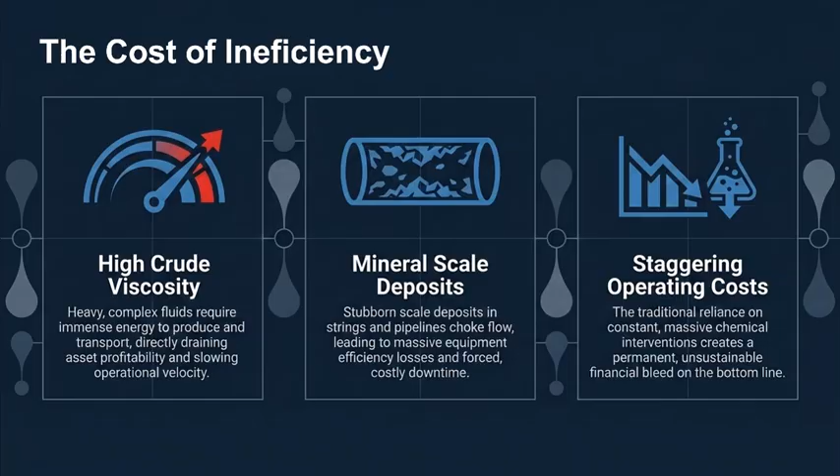Second, mineral scale deposits. Scale formation inside strings and pipelines restricts flow, reduces equipment efficiency, and can eventually force costly interventions and downtime. Third, staggering operating costs. Traditional methods often rely on constant chemical treatment and repeated maintenance actions, creating a permanent financial burden on the operation. In other words, fluid inefficiency is not just a technical problem. It is a continuous drain on reliability and profitability.

The oil and gas industry has traditionally relied on a reactive approach to fluid treatment. That usually means chemical dependency, surface treatment, continuous downhole injection, high recurring OPEX, and increased environmental impact. The Magnex standard changes this logic. Instead of reacting to the problem after it appears, Magnex applies proactive physical magnetic activation directly at the source. The system is installed inside the well, acting where the fluid is being produced, without depending on continuous chemical consumption.

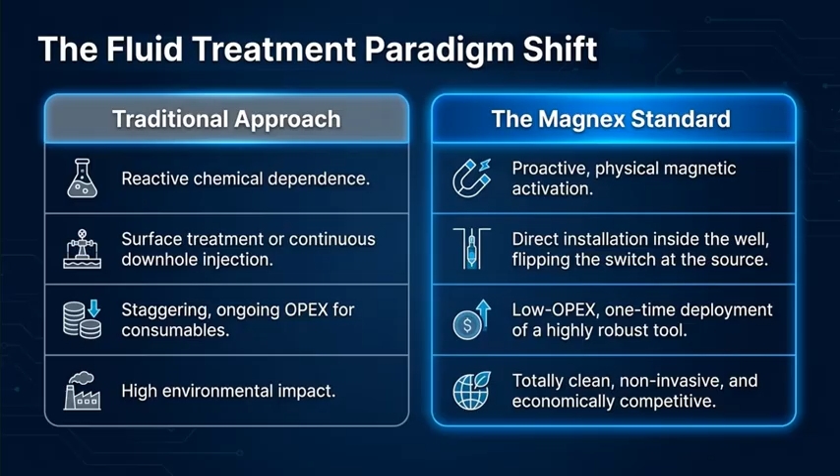The financial profile is also fundamentally different. Instead of ongoing consumable costs, Magnex offers a robust physical tool designed for long-term operation and low OPEX. And from a sustainability perspective, the technology is clean, non-invasive, and economically competitive. This is the paradigm shift from reactive chemical treatment to proactive magnetic activation.

Magnex is not presenting a theoretical concept. This is a proprietary technology platform developed through engineering, field experience, and industrial validation. The first pillar is proprietary engineering. Magnex's technology is heavily tested and supported by Brazilian patents and international PCT filings. The second pillar is Petrobras homologation. Magnex is officially qualified and has active field applications in major offshore and pre-salt projects, including Mero, Sépia, and Atapu.

The third pillar is global integrator expansion. Magnex is actively developing opportunities with major oilfield service companies and international integrators, including Halliburton, 3R Petroleum, and Superior Energy Services. This combination of intellectual property, technical qualification, and global business development shows that Magnex is already beyond the testing phase. It is a proven technology ready for broader industrial and international scale.

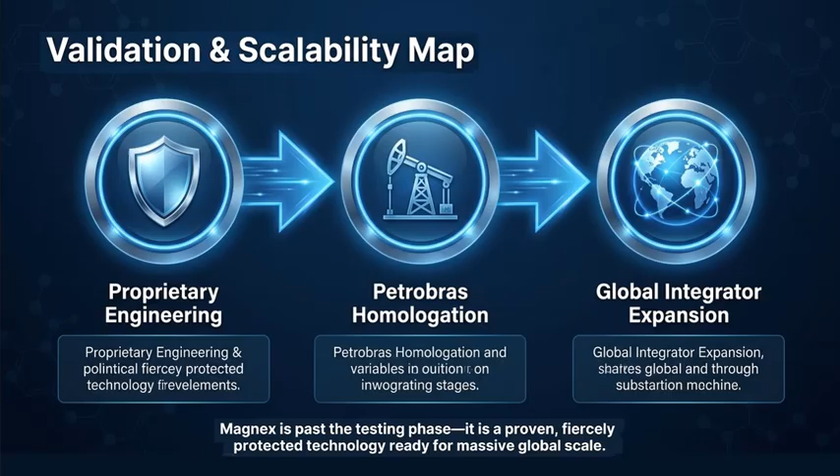At the center of this solution is Magnex's proprietary Submagnetics technology. Submagnetics are downhole magnetic activation tools designed to physically activate and transform fluid flow directly inside the well. The tool is engineered for harsh downhole environments and built for reliable operation under extreme field conditions. Its purpose-built core encapsulates high-intensity magnetic arrangements, designed to expose the produced fluid to a concentrated magnetic field as it flows through the production string.

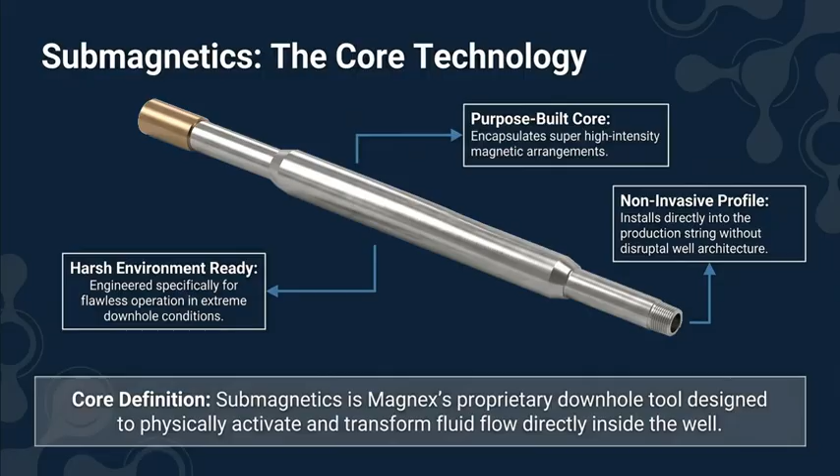Another important point is its non-invasive profile. The tool is installed directly into the production string without disrupting the well architecture. In practical terms, Submagnetics brings the treatment into the well itself, acting directly at the source of the flow challenge.

This slide illustrates the core concept of magnetic activation inside the well. On the left, we see untreated complex fluid. The flow is less organized, more resistant, and more vulnerable to viscosity-related losses and scale-forming behavior. In the center, the fluid passes through the Submagnetic, where it is exposed to a high-intensity magnetic field. On the right, the fluid exits as an activated, lower viscosity flow, with improved flow behavior and reduced tendency for scale-forming elements to cluster and adhere.

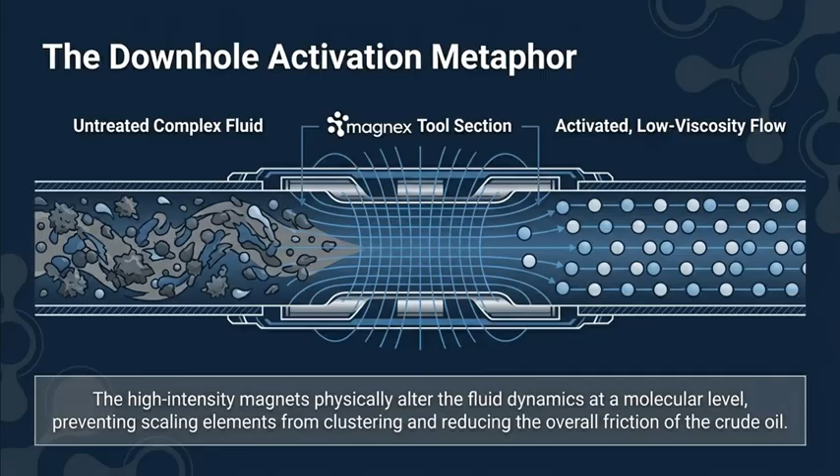The key point is that magnetic activation acts physically on the fluid dynamics. It helps reduce internal flow resistance and supports a more efficient production profile. The value of Magnex technology comes from its dual-action mechanism. The first benefit is the reduction of crude oil viscosity. Lower viscosity means lower flow resistance, better mobility, and improved production conditions over time.

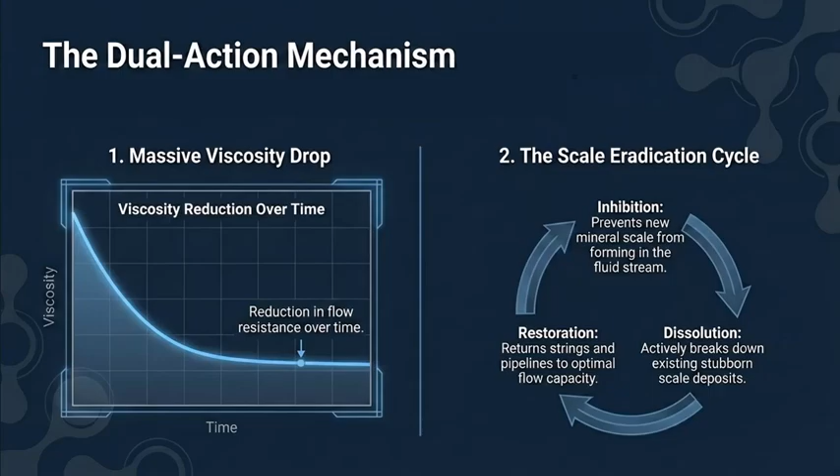The second benefit is the scale eradication cycle. This cycle begins with inhibition, helping prevent new mineral scale from forming in the fluid stream. Then comes dissolution, where the process supports the gradual breakdown of existing stubborn scale deposits. Finally, we have restoration, where strings and pipelines can recover improved flow capacity as restrictions are reduced. Together, these effects create a powerful operational advantage: better flow assurance, reduced restrictions, lower chemical dependency, and improved production stability.

The value proposition is clear and measurable. Magnex has observed up to 46% reduction in crude oil viscosity in laboratory activation cycles. The technology has also reported up to 87% reduction in baseline organic deposition rate. Beyond these performance indicators, the solution brings 4 strategic advantages. It is clean, reducing chemical dependency and improving the corporate sustainability profile.

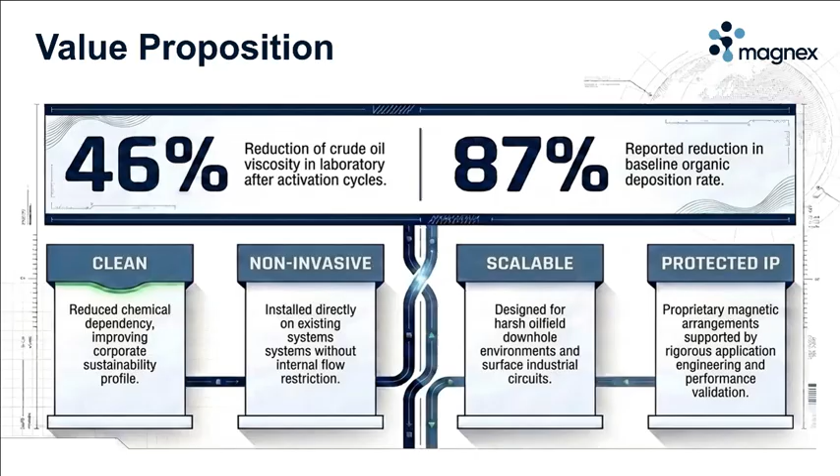It is non-invasive, designed to be installed directly on existing systems without internal flow restriction. It is scalable, applicable to harsh oilfield downhole environments as well as surface industrial circuits. And it is protected by intellectual property, with proprietary magnetic arrangements supported by application engineering and performance validation.

Magnex's competitive advantage is not based on a single invention. It is the result of 4 integrated pillars. First, a strong scientific foundation, combining deep expertise in fluid dynamics and magnetic physics. Second, proprietary engineering, with high-performance manufacturing of customized magnetic devices. Third, practical field experience, built from real operational knowledge in Brazilian pre-salt applications.

And fourth, protected intellectual property, supported by Brazilian patents and international PCT filings. This is what creates Magnex's competitive moat: the synthesis of science, engineering, manufacturing capability, field validation, and protected technology.

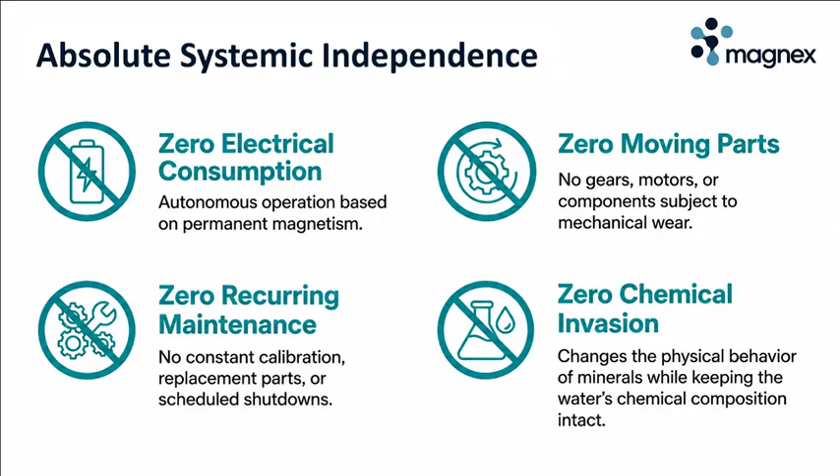One of the strongest operational advantages of Magnex technology is its systemic independence. The system operates with 0 electrical consumption because it is based on permanent magnetism. It has 0 moving parts, meaning there are no gears, motors, or mechanical components exposed to wear. It requires 0 recurring maintenance, with no constant calibration, no replacement parts, and no additional scheduled shutdowns. And it creates 0 chemical invasion, because it changes the physical behavior of minerals while keeping the water's chemical composition intact.

The conclusion is straightforward. A clean, proven paradigm shift is already available today. Magnex Technologies is transforming fluid treatment through sustainable and economically competitive magnetic solutions. For oil and gas operations, this means an opportunity to reduce chemical dependency, improve flow efficiency, protect critical assets, and enhance production reliability. So the question is no longer whether fluid inefficiency is costing money. The real question is, with this level of technology now available, how much longer can your operations afford to rely exclusively on traditional methods?